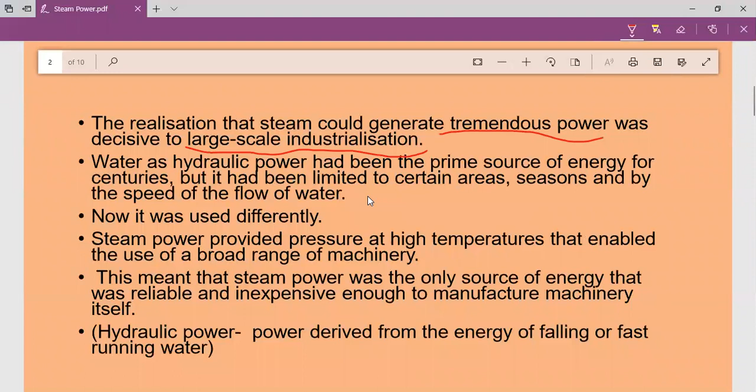Water as hydraulic power had been the prime, or main, source of energy for centuries. But it had certain limitations: water was not available in all seasons, and the speed of the water was not the same every time, so it was used differently at different times.

What is the advantage of steam power over hydraulic power? Steam power can provide or generate pressure at high temperature, and it will make the machinery move, allowing you to use machines in larger amounts.

So how do we exploit steam power? Comparing to hydraulic power, steam was the only source of energy that was reliable, meaning you can depend on it, and inexpensive, meaning it was not costly to manufacture the machinery itself.

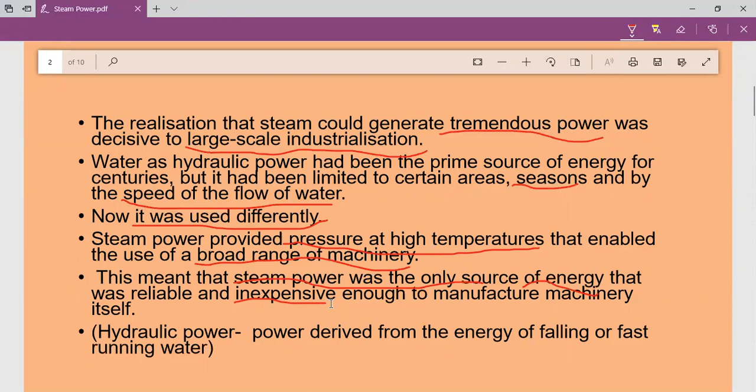Now, hydraulic power is defined as power derived from falling or fast running water, that is, from a waterfall. This power was used for construction of dams and for the working of water mills.

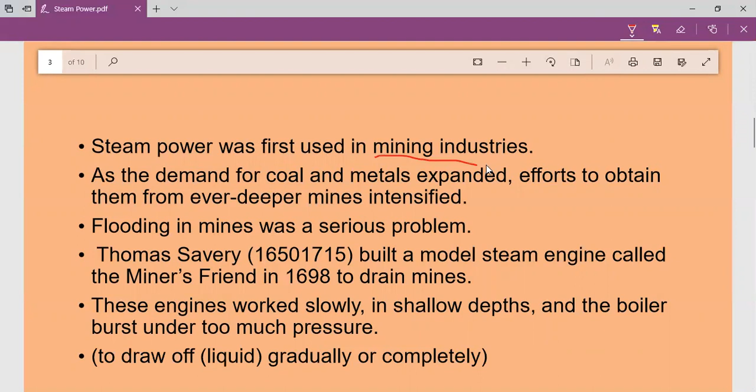Steam power was first experimented with in mining industries, for taking out minerals. They used steam power to make machines work and take out minerals from greater depths. As you know, during the Industrial Revolution, the demand for coal and metals, especially iron, was increasing, so a lot of minerals had to be mined from greater depths.

It was not possible for human beings to keep digging to take out the minerals, so some alternative mechanism had to be invented or discovered. For that purpose, they started using steam power in connection with the machines to work them.

But the problem was flooding; a lot of water went inside the mines, and if the mines are filled with water, you cannot do anything. So Thomas Savery came up with a steam engine called Miner's Friend in 1698 to drain the mines, that is, to take out water completely. He brought out an engine that worked with the help of steam.

These engines were not very efficient; they worked very slowly and only at shallow depths, meaning they could not go to deeper distances. And if the boiler worked at full capacity, it would burst under too much pressure. So it had certain weaknesses, being the first machine to drain the mine, but still an effort was made to invent something. It was like a turning point in the invention of the steam engine.

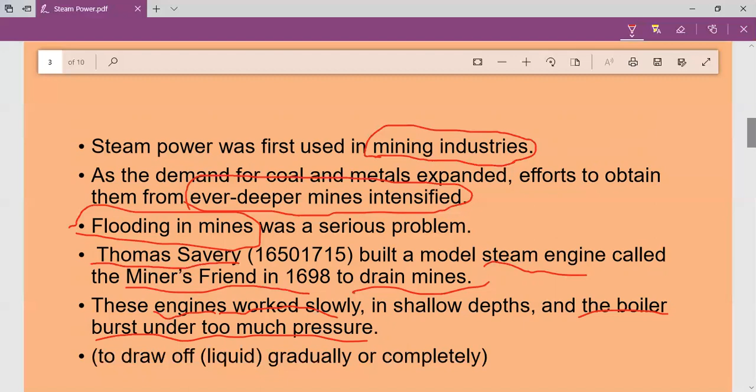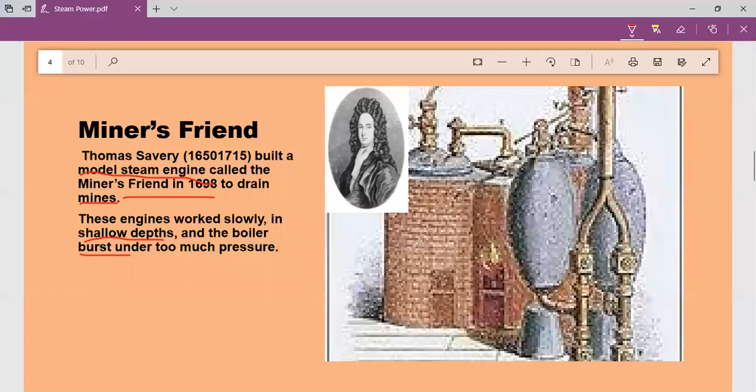This was the Miner's Friend, a picture of Thomas Savery, who built this machine in 1698 to drain water from mines, because the mines were filled with water. As mentioned, it worked very slowly at shallow depths, and if you put a lot of pressure, it burst and broke down. That was the problem.

Next, a steam engine was built by Thomas Newcomen, which was revolutionary and transformed mining. But it had a problem: it lost energy and could not work continuously. Energy was lost due to cooling, since steam is generated from below and filled into the cylinder, but afterward it cooled down, and because of this cooling it was not very efficient.

That is because of the condensing cylinder, meaning water vapor converted into water again. That is what we call condensation. Because of that it had a problem. But again, it was like a revolutionized invention by Newcomen.

First of all, as I told you, steam engines were invented for mining purposes only. But with the invention of James Watt, or James Watt's perfected steam engine, it started being used in machines. Steam power, generated from coal, was used to work machines in factories, not only for mining. So it revolutionized industrialization. A lot of production became possible because of his invention, because of his concept.

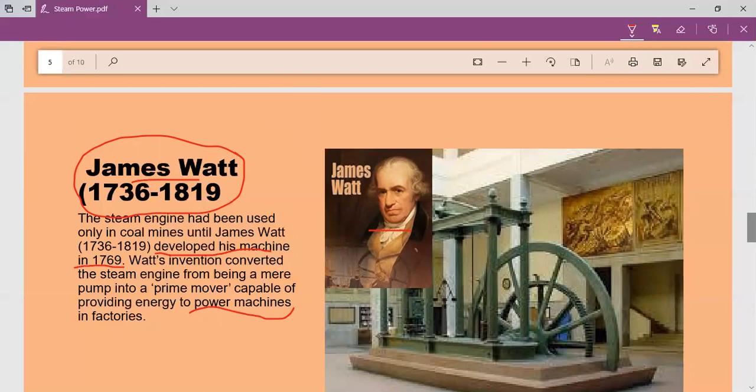His friend helped him a lot, because James Watt did not have much money for making the steam engine. So he was helped by the wealthy manufacturer Matthew Boulton, who helped him a lot. Both of them founded a factory called Soho Foundry in Birmingham.

Steam engines were produced in large numbers because demand for steam engines was increasing day by day, and finally hydraulic power was replaced by the steam engine. That was a greatest achievement.

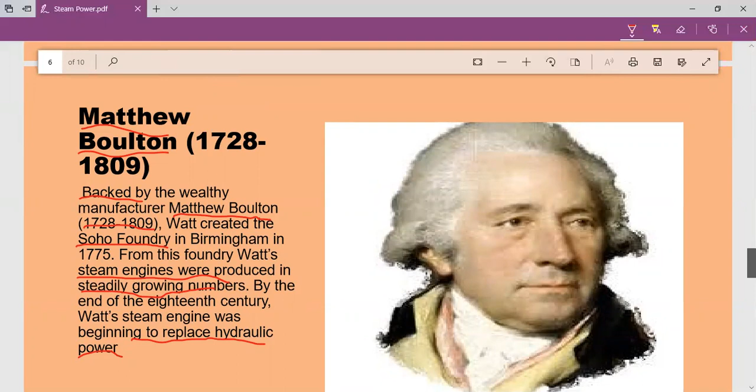Matthew Boulton and James Watt perfected the steam engine. That condensation problem was solved. Thomas Newcomen's machine had a condensation problem, so it was solved with the invention of James Watt. He made a separate cylinder for heating and a separate cylinder for condensation, for cooling down.

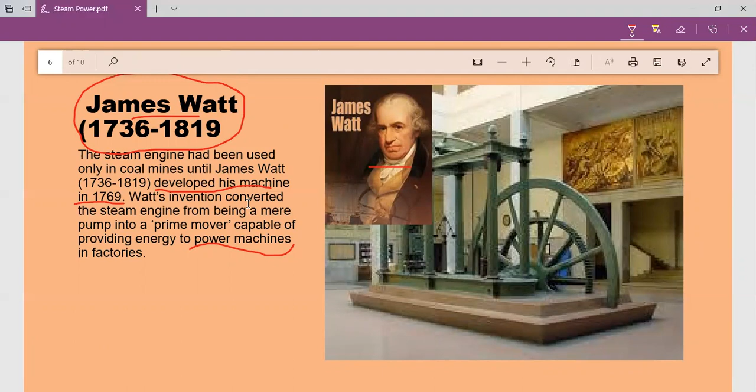In the beginning, Thomas Newcomen had only one cylinder for taking out the vapor from coal and for the cooling down process. But here, James Watt separated the cooling cylinder and the heating cylinder. Because of that, the condensation problem was solved to a great extent, and it revolutionized production.

It was further perfected, then started with the use of lighter, stronger metals and scientific knowledge. So in 1840, British steam engines were generating more than 70% of all European horsepower.

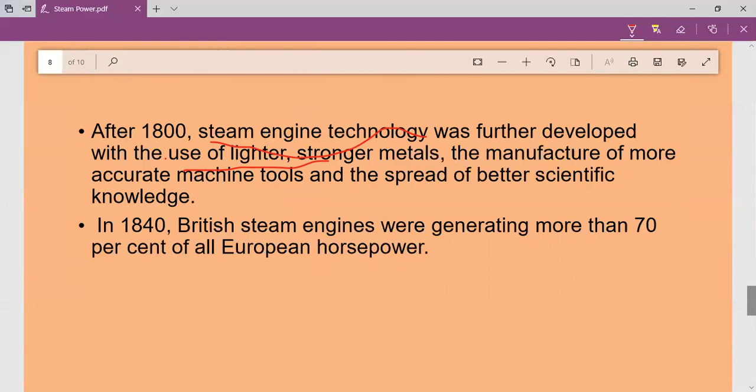Next, let us learn what is horsepower. Watt's inventions were not limited to the steam engine. He was a brilliant guy, and he invented a chemical process for copying documents, like Xerox. It's not printing, you can say.

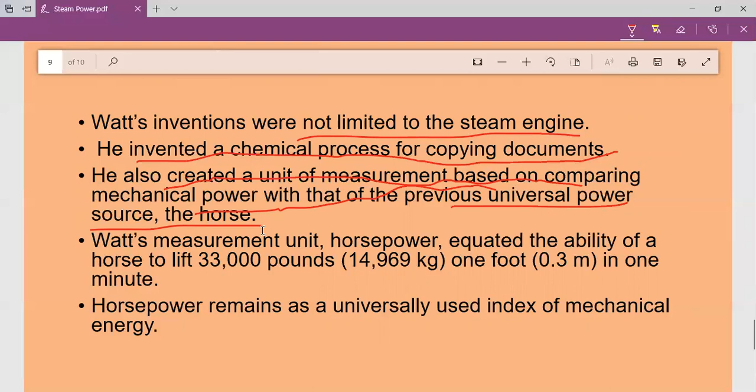He created a unit of measurement based on mechanical power, meaning muscle power, our energy, compared with the universal power source, that is the horse. So everything was compared using horsepower, and he created a unit of measurement called watt. What is horsepower? It is how much weight a horse can lift with the help of a pulley. He clearly observed the horsepower, and he himself found out a measurement unit called watt, which is accepted universally as watts.

So the measurement unit known as horsepower was equal to the ability of a horse, how much a horse can lift in 1 foot in 1 minute. That is 33,000 pounds, equal to 14,969 kg. That is what we call horsepower.

Why is horsepower used to measure mechanical power, muscle power? Horsepower remains a universally accepted index of mechanical energy, that is machine energy, physical force, how much physical power you have, how much weight you can lift. That is what we call horsepower, and it was equated according to Watt's theory or Watt's concept.